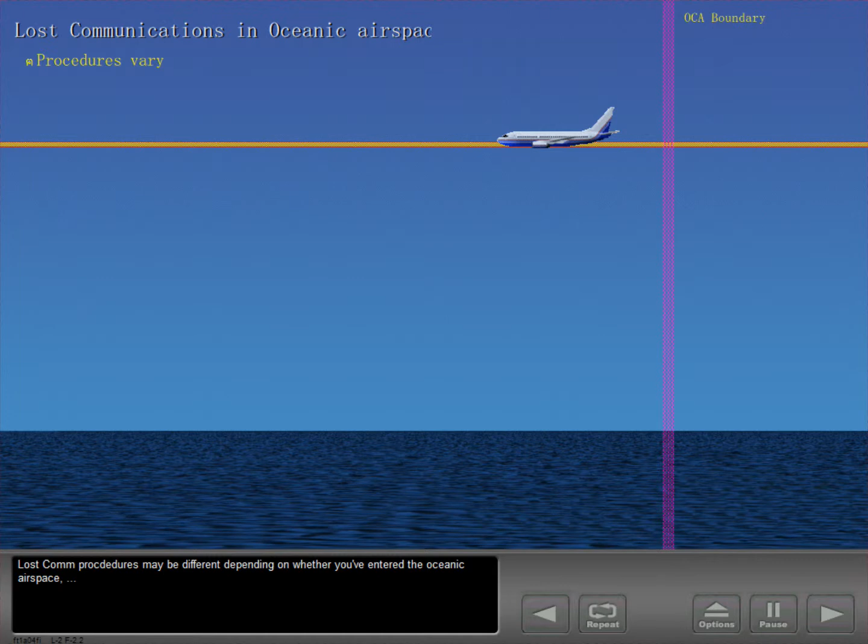Procedures for the loss of radio communication can vary. Lost comm procedures may be different depending on whether you've entered the oceanic airspace and whether you've received an oceanic clearance yet. In general, here are some things to remember.

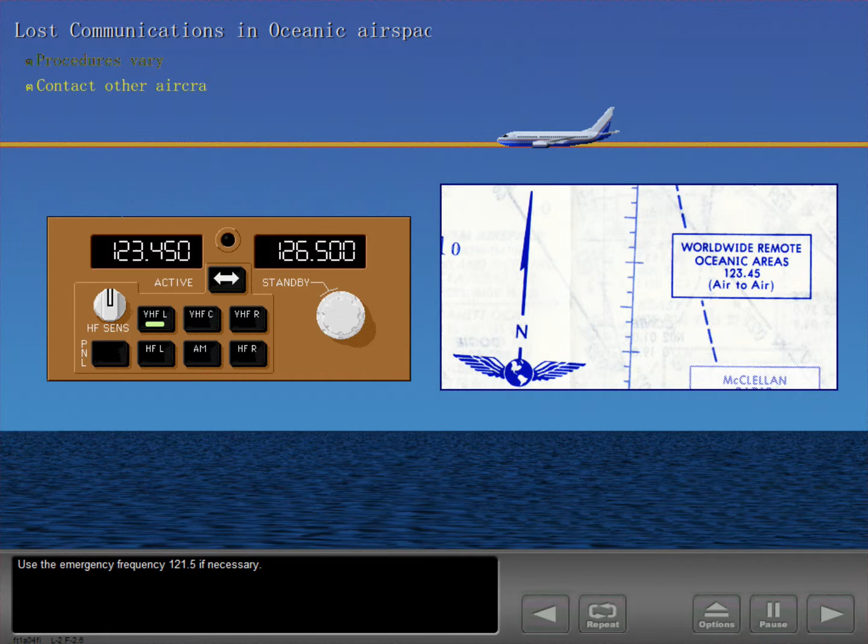If unable to reach ATC, attempt to contact other aircraft to relay a message. Tune left VHF radio to the air-to-air frequency. Use the emergency frequency 121.5 if necessary. If all communication is lost, set the transponder to 7600.

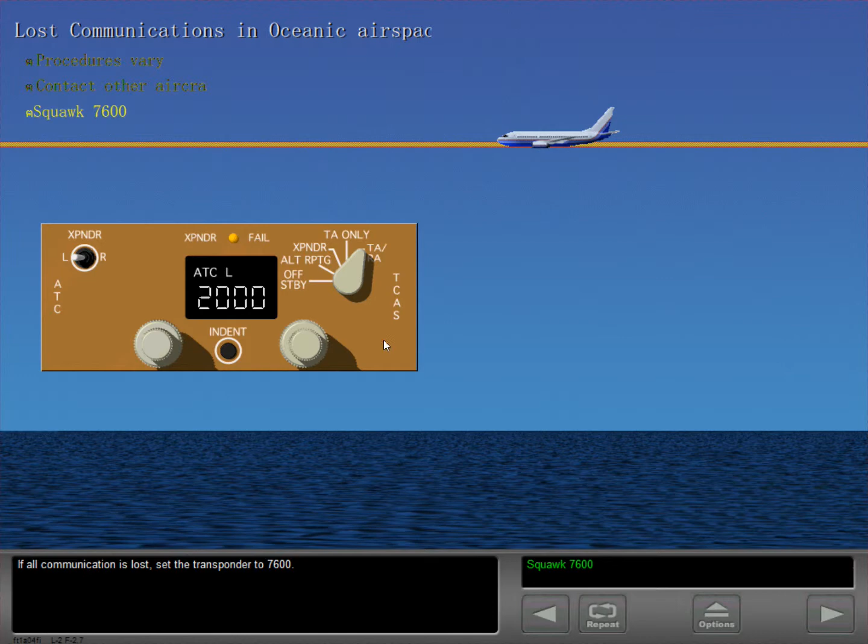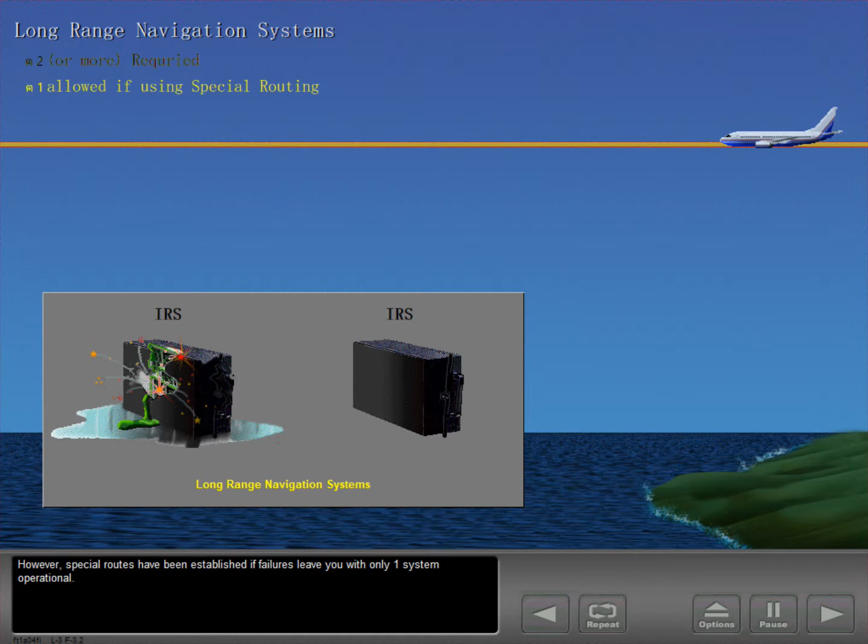Remember, at least 2 long-range navigation systems are required. However, special routes have been established if failures leave you with only one system operational. If both systems fail, entry to MNPS airspace is not allowed.

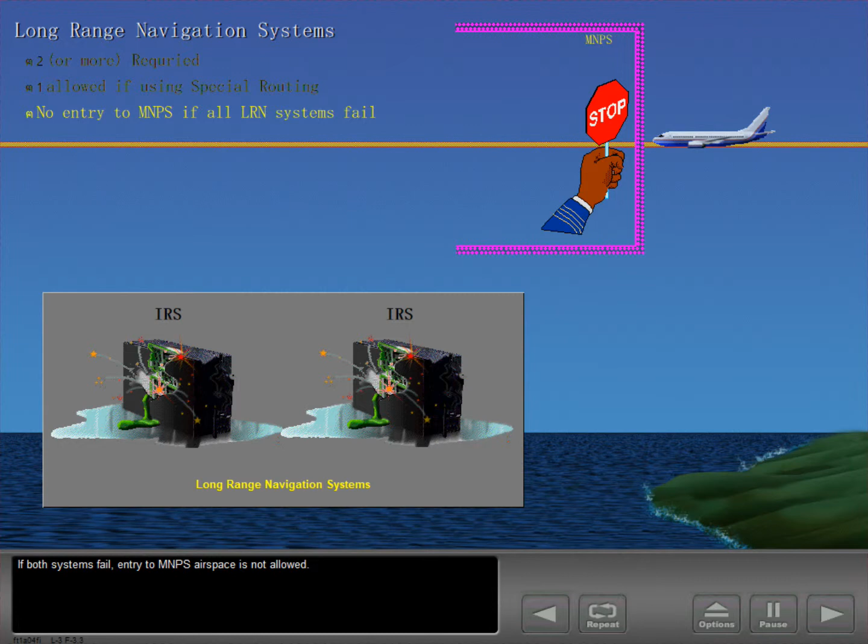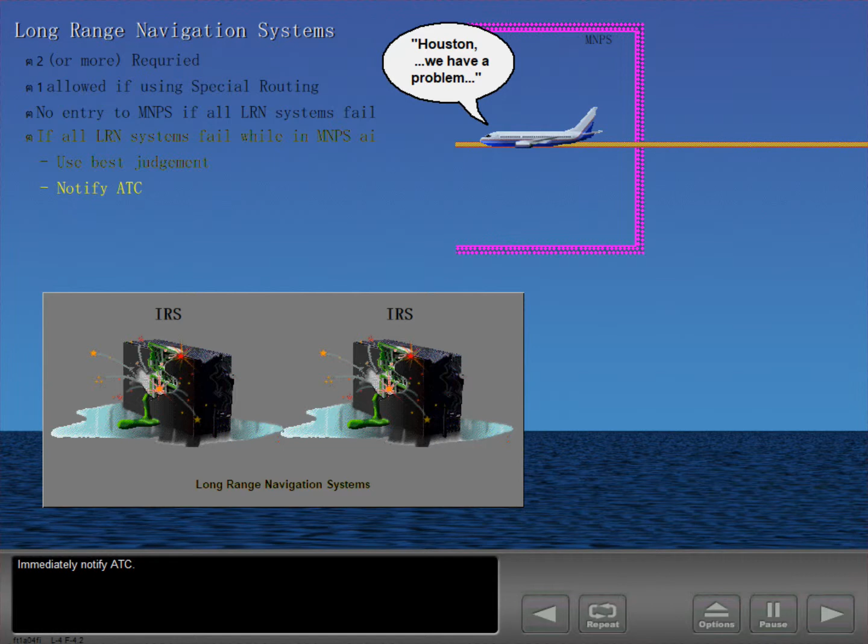If total failure occurs while in MNPS airspace, then pilots should use their best judgment. Immediately notify ATC. Keep a vigilant lookout for other aircraft. Resources available to you include radio navigation aids, visual sightings, weather radar ground returns, and other aircraft for useful information.

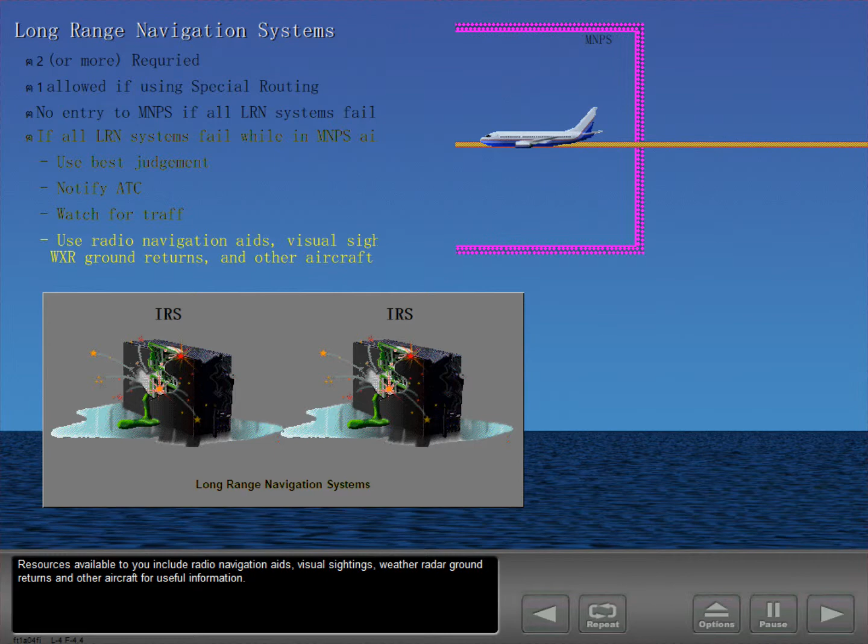3 types of contingencies for domestic RVSM airspace are discussed next: equipment failures, weather-induced severe turbulence and/or mountain wave activity, and wake turbulence from other aircraft. Recall that in RVSM airspace, the maximum height difference between at least 2 primary altimeters should not exceed plus or minus 200 feet.

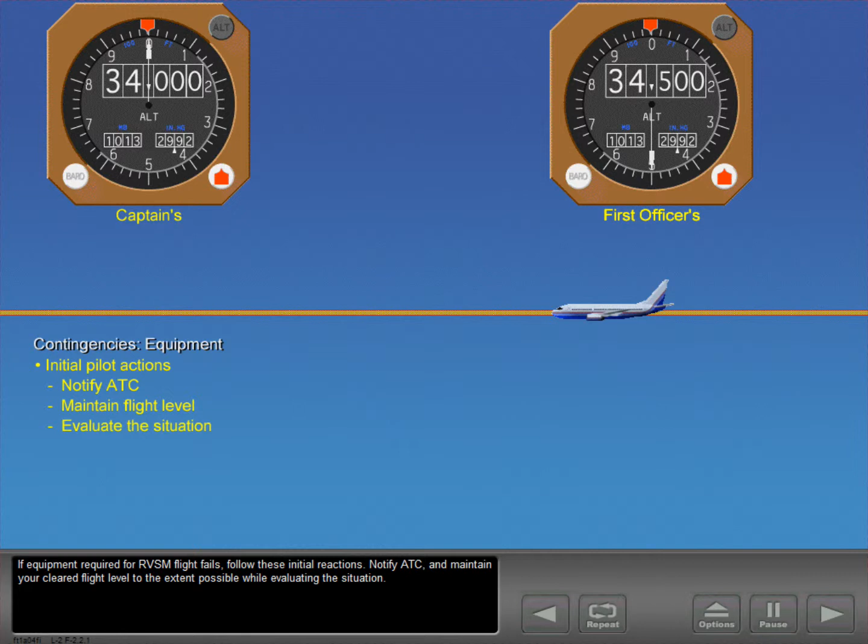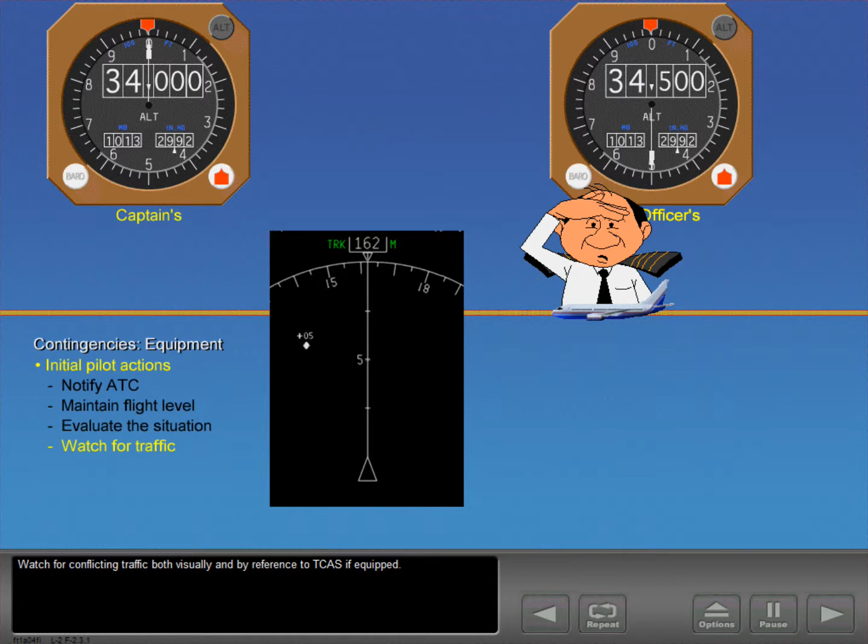If equipment required for RVSM flight fails, follow these initial reactions. Notify ATC and maintain your cleared flight level to the extent possible while evaluating the situation. Watch for conflicting traffic both visually and by reference to TCAS if equipped. Alert nearby aircraft by illuminating exterior lights, commensurate with aircraft limitations.

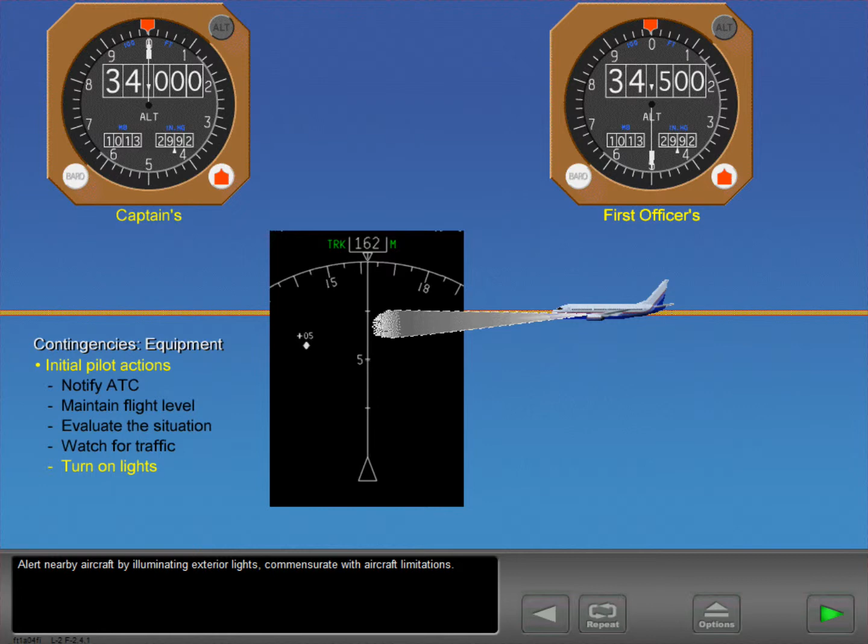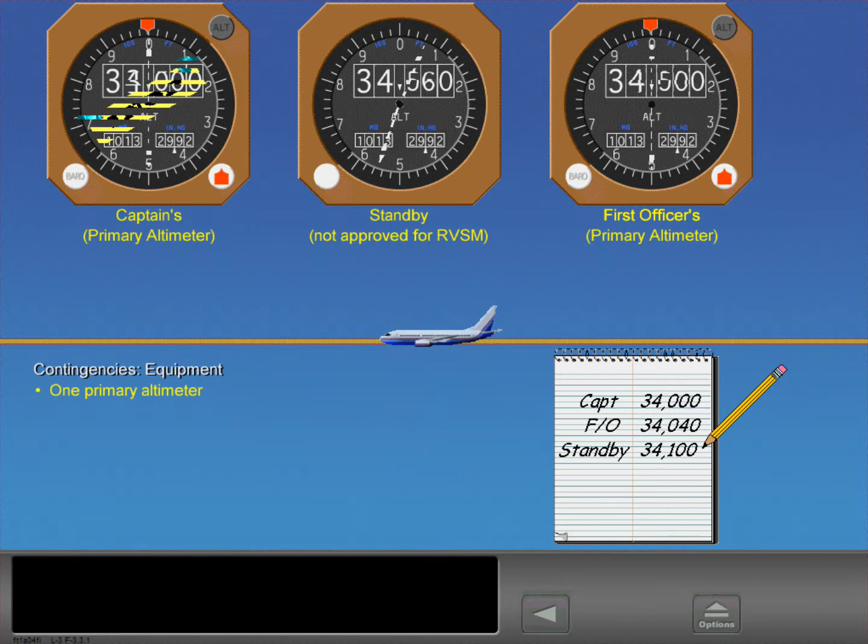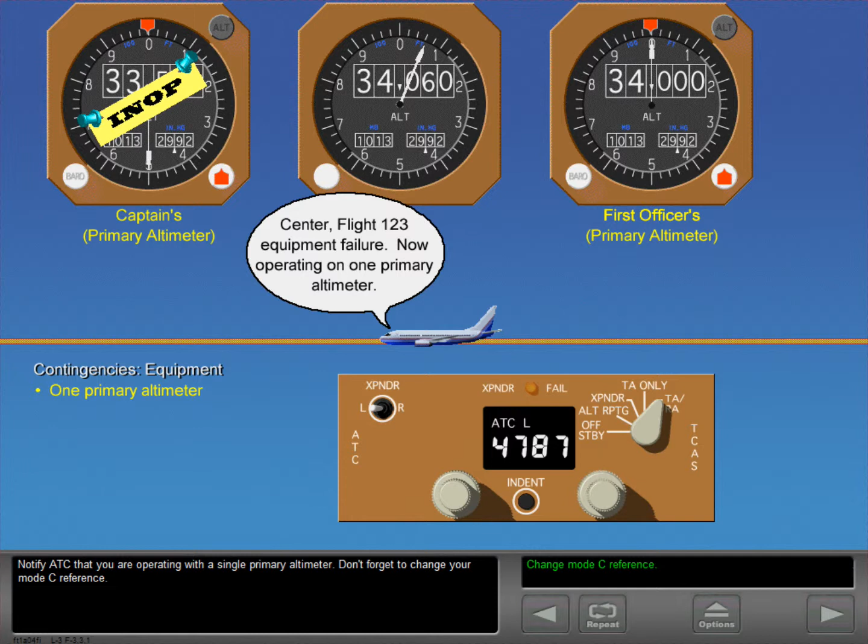For this situation, cross-check your standby altimeter to see if you can confirm at least one accurately operating primary altimeter. For this example, it appears that the captain's altimeter is the least accurate. Use the first officer's altimeter for aircraft control. Notify ATC that you are operating with a single primary altimeter. Don't forget to change your Mode C reference. ATC will acknowledge your situation.

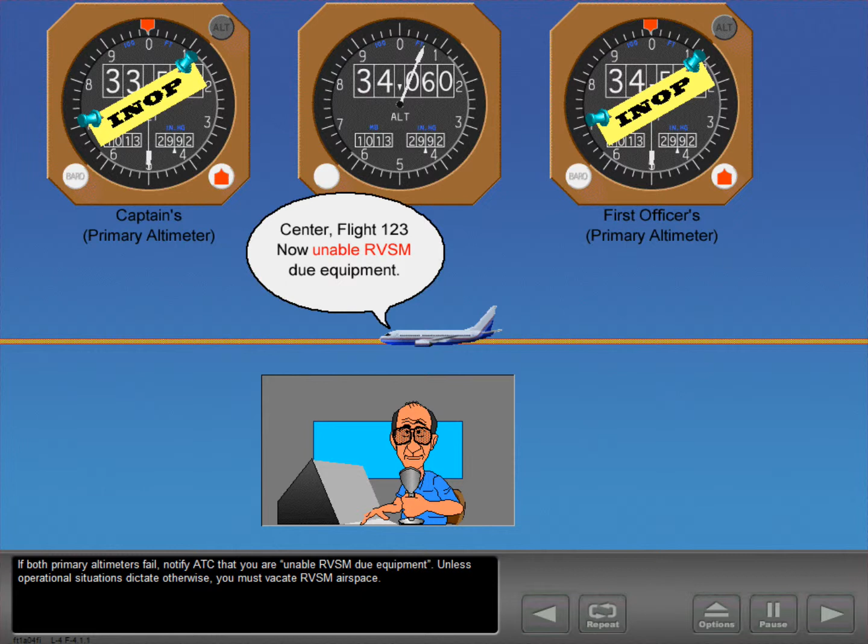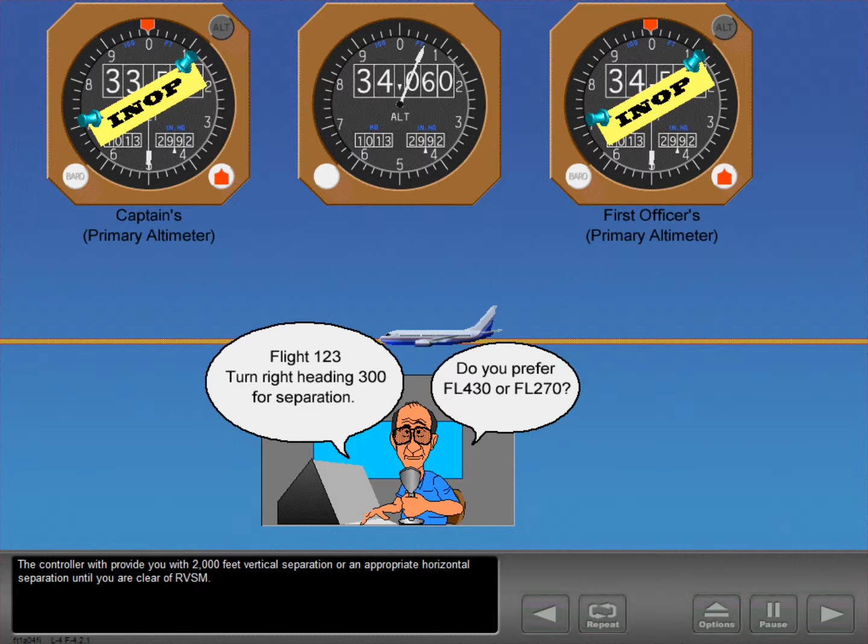If both primary altimeters fail, notify ATC that you are unable RVSM due equipment. Unless operational situations dictate otherwise, you must vacate RVSM airspace. The controller will provide you with 2,000 feet vertical separation or an appropriate horizontal separation until you are clear of RVSM. Remember, failure of your automatic altitude control system, altitude alerter, or transponder also constitutes an unable RVSM situation.

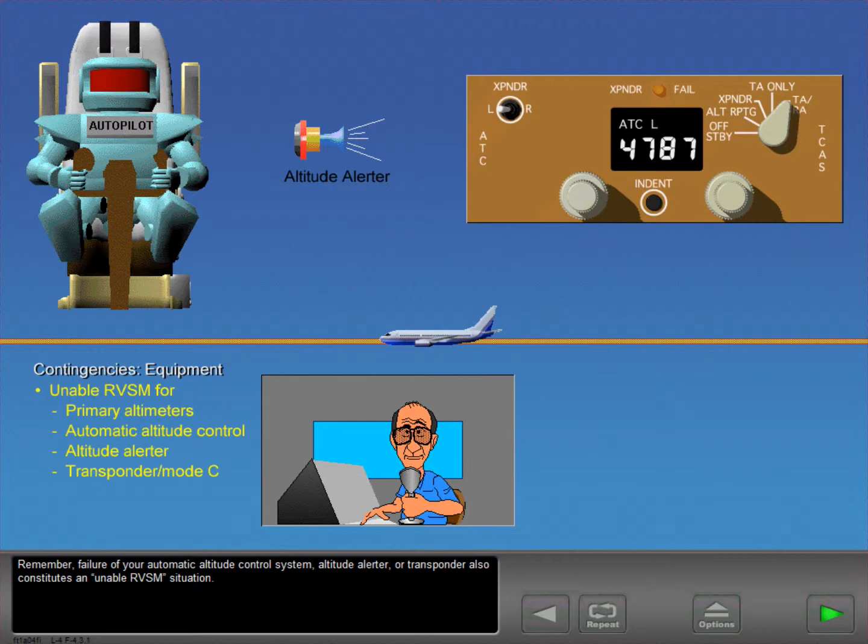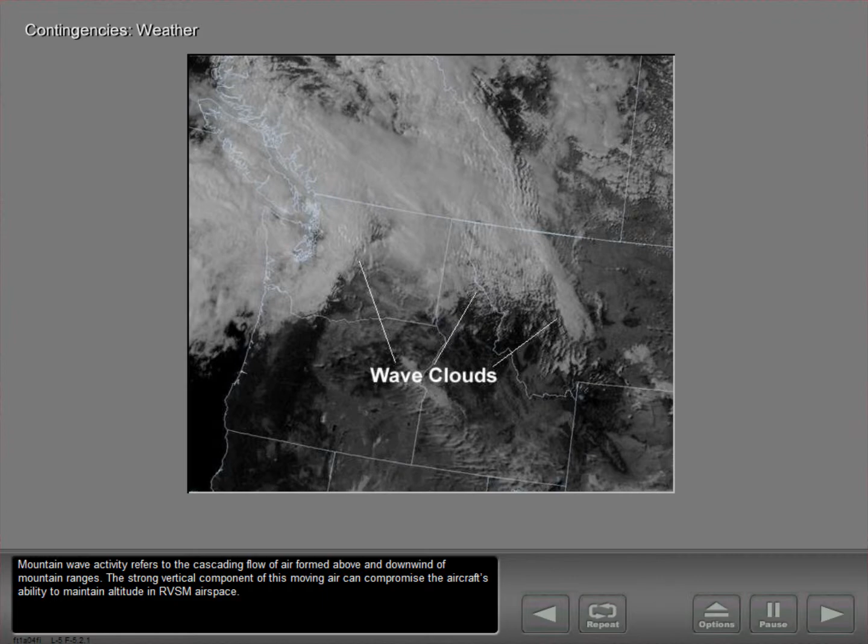Next, we'll look at contingencies based on weather, such as severe turbulence or mountain wave activity. Mountain wave activity refers to the cascading flow of air formed above and downwind of mountain ranges. The strong vertical component of this moving air can compromise the aircraft's ability to maintain altitude in RVSM airspace. Indications of mountain wave activity include altitude excursions and airspeed fluctuations with or without associated turbulence. Mountain waves can also cause pitch and trim changes to maintain altitude with accompanying airspeed fluctuations.

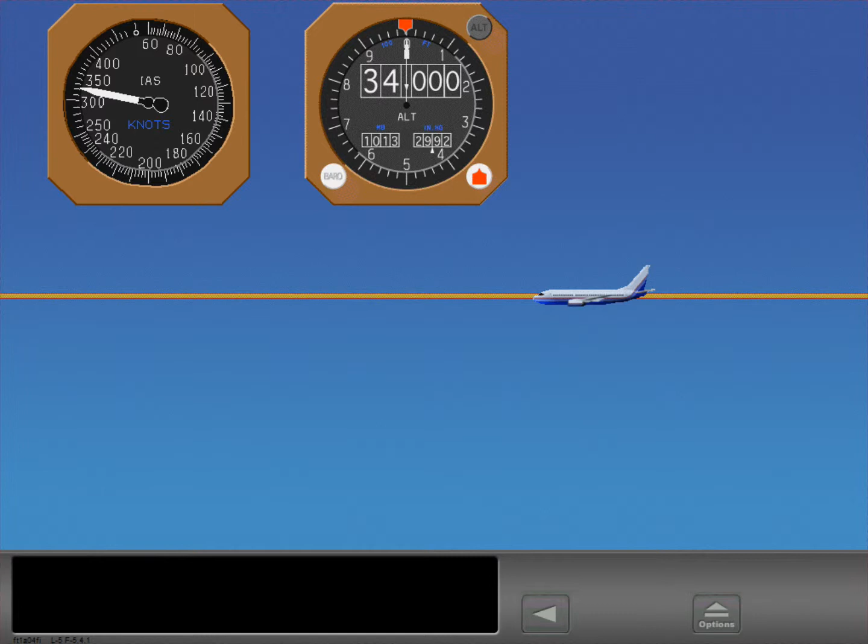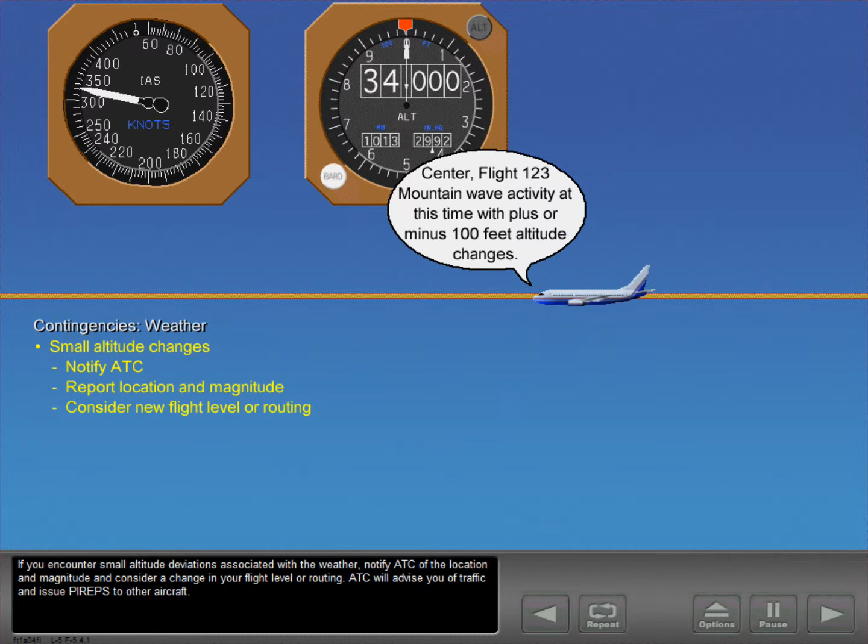If you encounter small altitude deviations associated with the weather, notify ATC of the location and magnitude and consider a change in your flight level or routing. ATC will advise you of traffic and issue PIREPs to other aircraft.

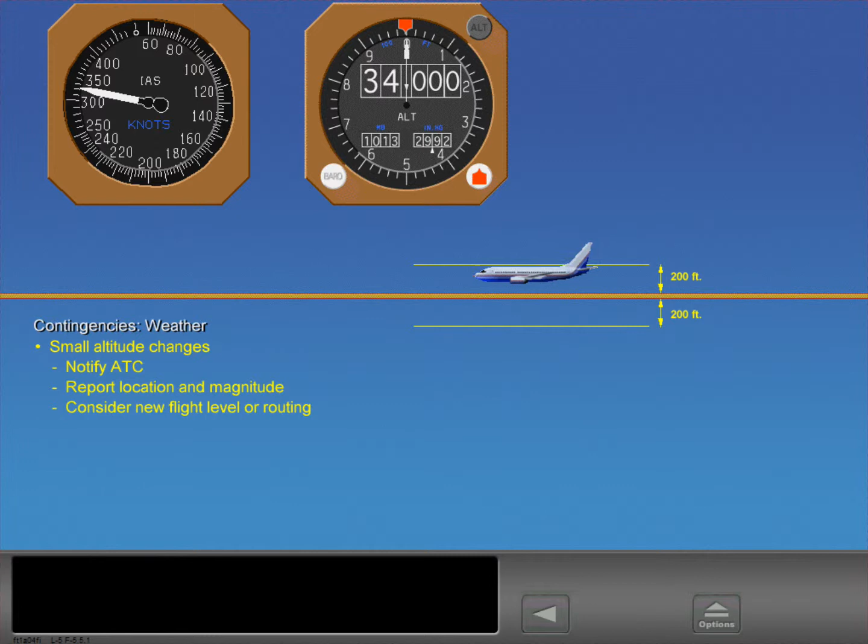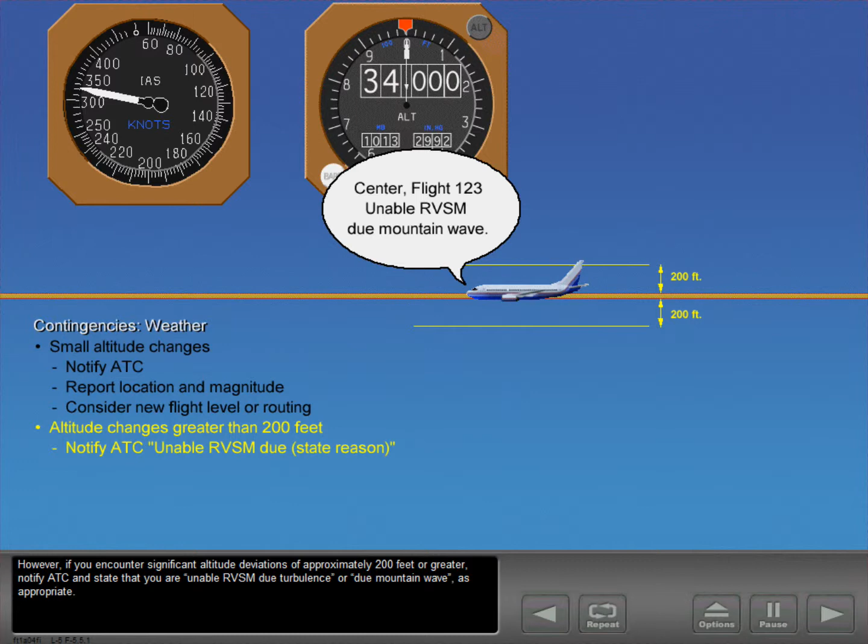However, if you encounter significant altitude deviations of approximately 200 feet or greater, notify ATC and state that you are unable RVSM due turbulence or due mountain wave as appropriate. The controller will advise you of conflicting traffic and provide vectors to aircraft to avoid merging targets. As before, consider a change in your flight level or a new route to avoid the area of mountain waves or turbulence.

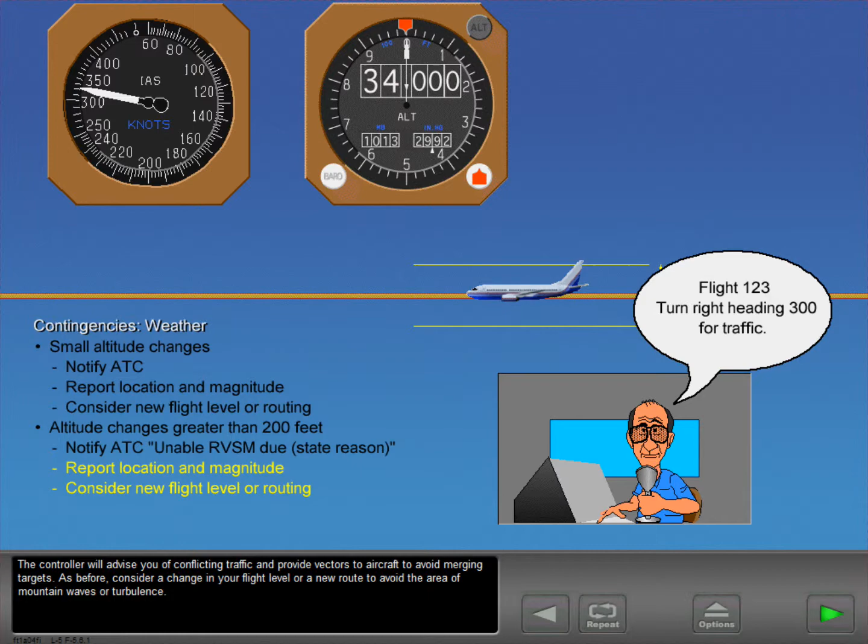Because of the reduced separation, wake turbulence avoidance may be necessary. Wake turbulence can occur in the vicinity of aircraft climbing or descending through your altitude. Be aware that aircraft 1,000 feet above you can produce a trail of wake turbulence from 10 to 30 miles behind it.

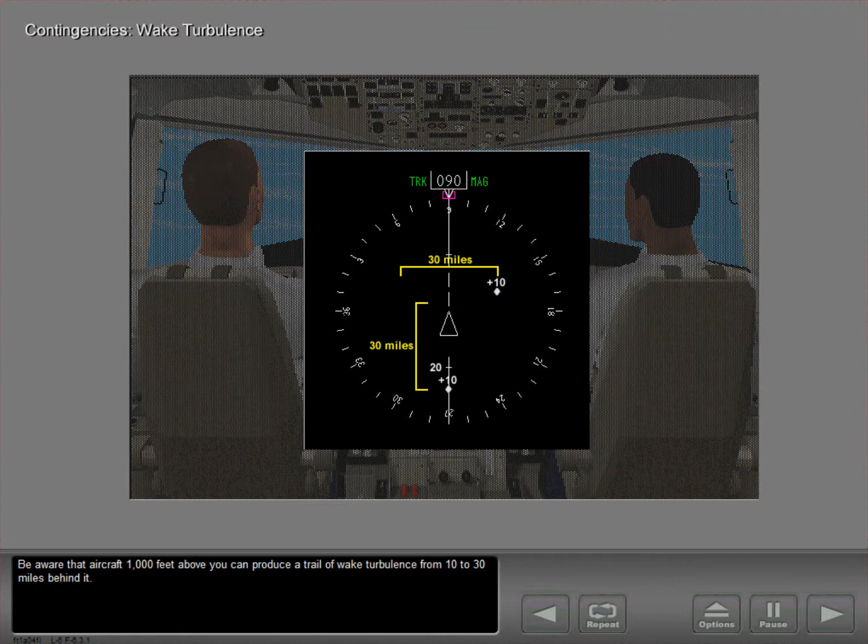If you encounter or anticipate wake turbulence in RVSM airspace, you can request a vector, an altitude change, or, if properly equipped, a lateral offset. In domestic U.S. airspace, pilots must request a clearance to fly a lateral offset. Strategic lateral offsets flown in oceanic airspace do not apply. Note that offsets of approximately one wingspan upwind can be sufficient to move the aircraft out of the preceding aircraft's wake turbulence vortex.